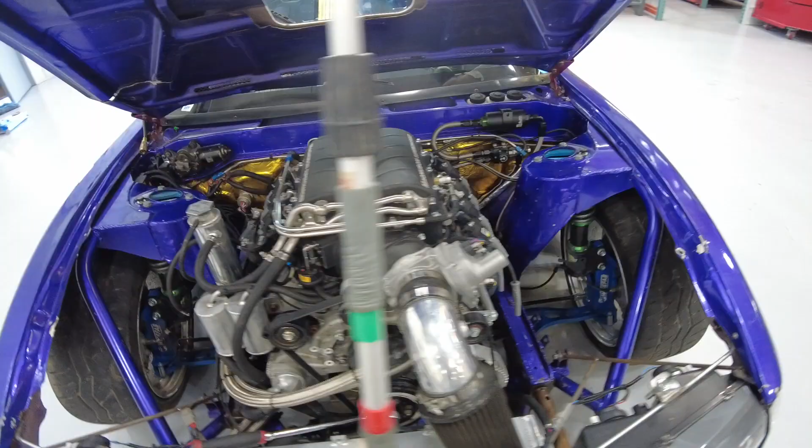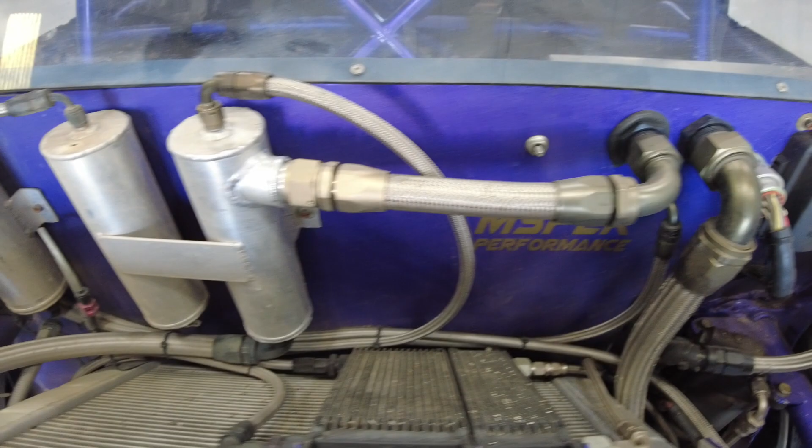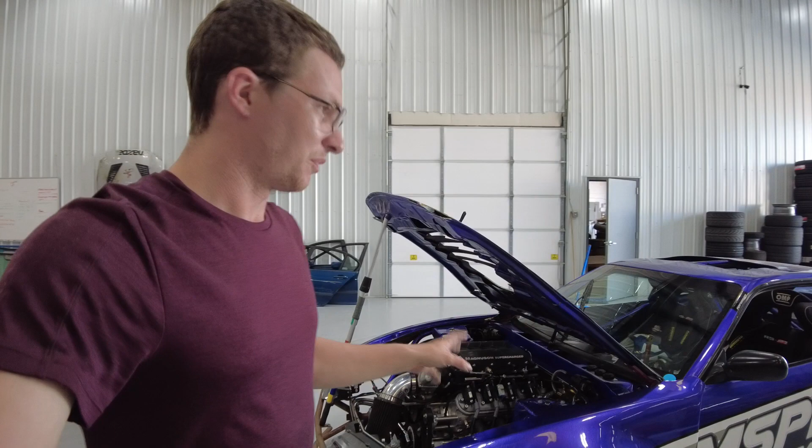The deal with Wes's car and why it's here is that on the practice day we went out and did two runs and it started overheating really badly. That's now a history of overheating with this car. When we were out at Hallett, it had some overheating issues, and we know the system has water, we know it's got good pressure, we've checked the cap. It's time to dig into this and figure out what's actually wrong, and the motor also struggles to start at this point, so we're going to dive in and see what we can figure out.

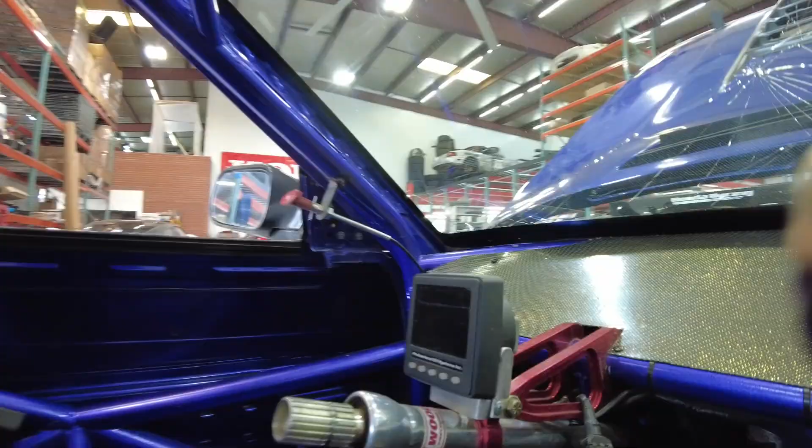This thing is running a crate motor LS3 with the big Magnuson supercharger kit. It also runs Pro EFI engine management, and it's got the little Pro EFI display in there, plus a nice little ARC PDM setup.

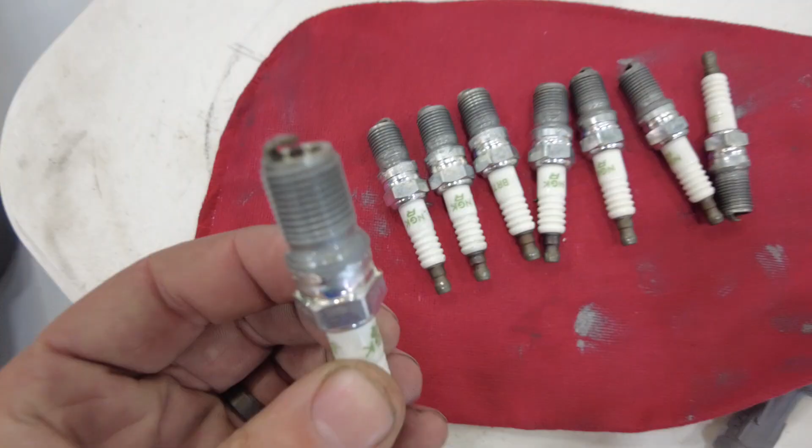I pulled out the plugs and gave them a quick look, but everything on these plugs looks really good, all identical, so that didn't tell us anything. I did a compression test, and though my compression tester probably doesn't read that accurately, it showed about 145 to 148 on all cylinders except for this one. We need to run a leak down on this cylinder and see if something's up with that.

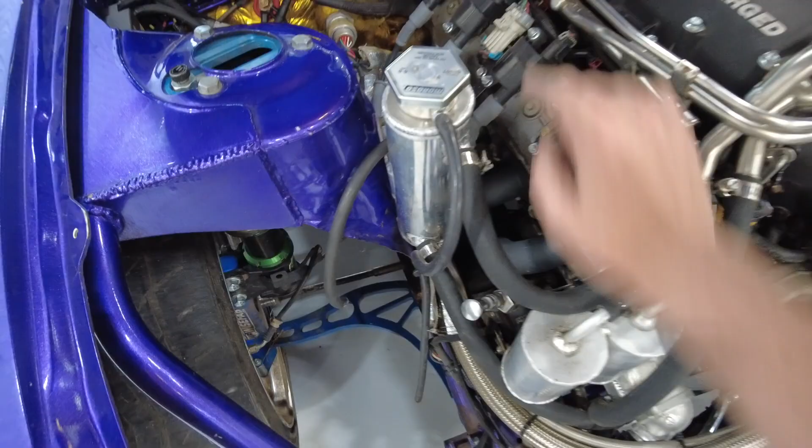Yeah, definitely something of concern here. 22% down on this cylinder, not good, and that's coming by the rings, so that's not good. Let's check another cylinder just to compare. Okay, here we are on the cylinder next to it, so that's quite a bit better. Not amazing, but quite a bit better.

Probably gonna get the borescope out. I want to look in those cylinders and see what the pistons look like. With the motor overheating as badly as it was, hopefully we don't have some other piston damage because of that. I got a fresh toy from China here.

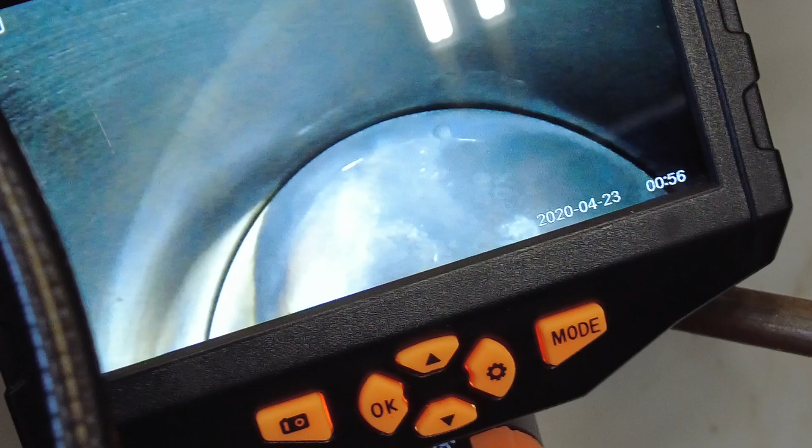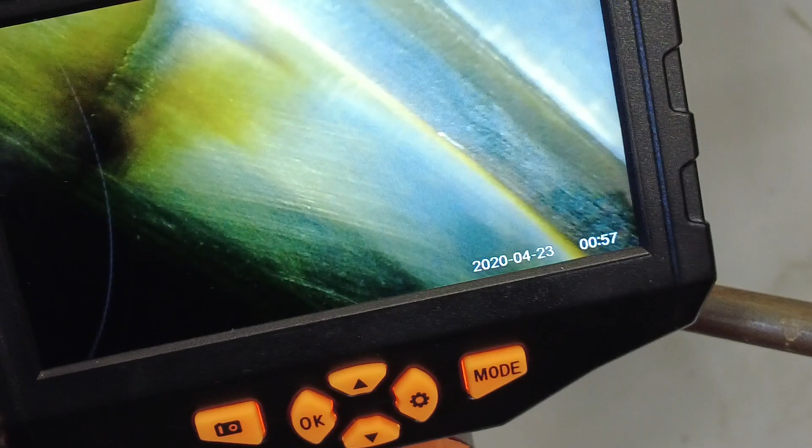Only the best Chinesium. I'm pretty excited about this new scope because it actually has two cameras, one on top and one on the side. That's really going to make looking at valves and things easier on these cylinders. Let's take a look at cylinder number 4, because its leak down was not looking so hot yesterday.

Not the best angle, let's flip to the other camera. Okay, so now we're looking at the cylinder wall. Well, there's your problem right there.

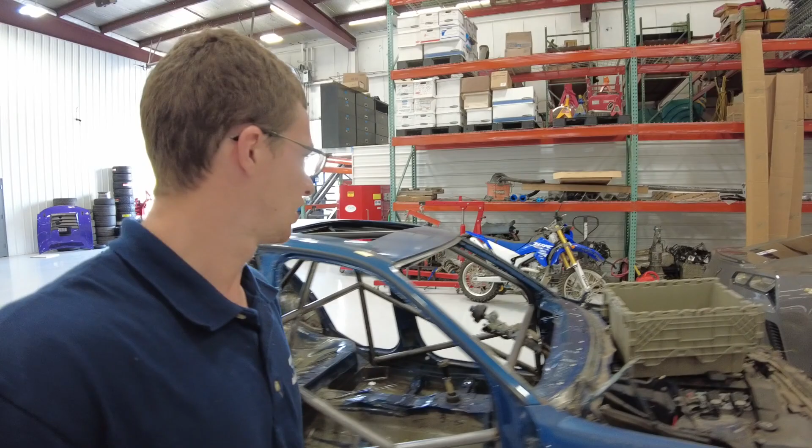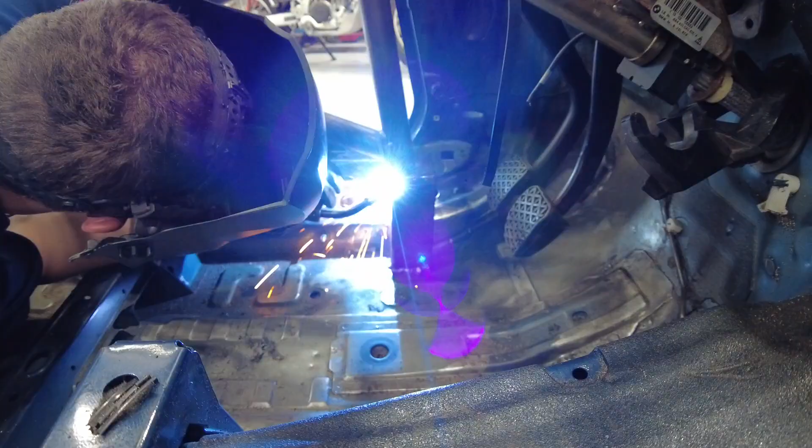So we get a hold of Wes and guess we get a fresh motor for this thing. We'll go from there. The 240 will sit for a little bit while we get a fresh motor for it and get it going.

And for tonight, it's time to work on the E46. So let's get the welder back out and get that cage finished. We want to make the steering column mount for that tonight, so let's get the steering column mount going.

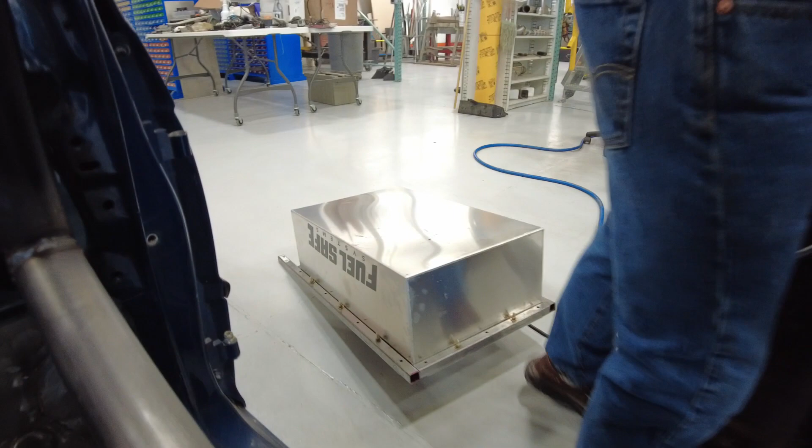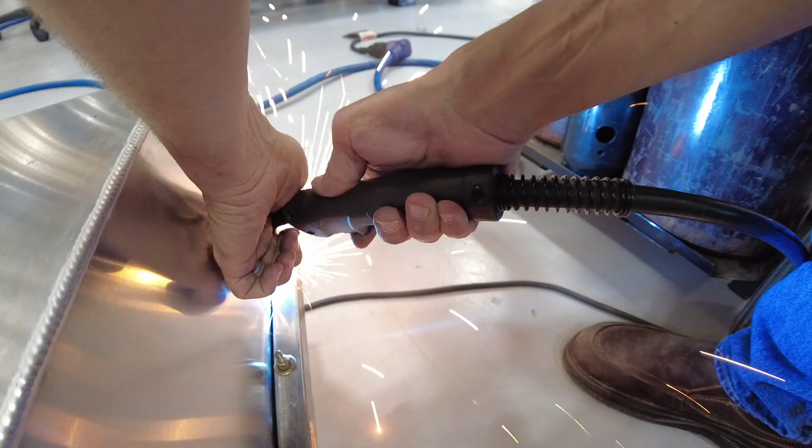Ooh, and I need a mount for the PDM, so a couple little things we'll get done on the cage. Let's get the CAD, get the plasma going, should be fun. Alright, get my boxes welded in, pretty excited about these.

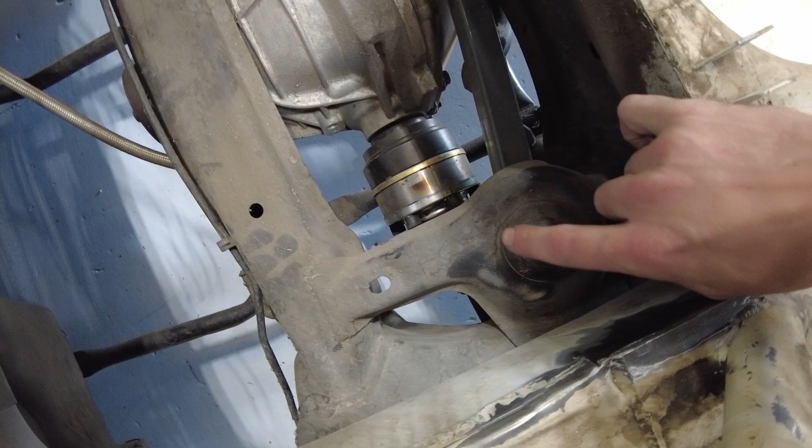Finally gonna finish this thing, those at the back corners. Finally coming together.

That box is in, that box is in. Pretty much all the boxes are in, but I gotta do the top of this box. The cage is just sitting here, so we just grab it and pull the cage over, and we should have good access to the top of that. I'll get it cleaned off and welded up.

Alright, that looks good. What are you working on? I am building a frame for the new fuel cell on Taurus.

Oh yeah? Here, we're gonna need this little guy. Ooh, new fuel cell frame? Nice.

Did you pull the subframe yet, or cut it? I have not pulled this. So, we do need to pull this subframe out so we can cut the tops of these off like we did on Tramp. That's looking nice.

What step is this? 1057? How many years have you been working on Moose?

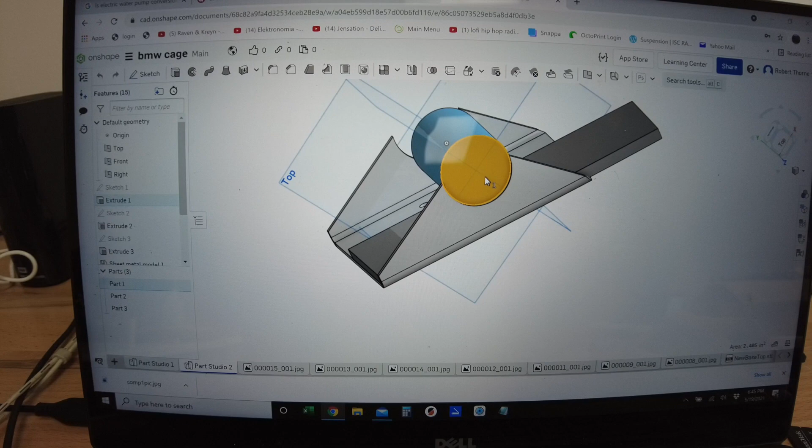Taurus SHO, yeah. We actually had a team, Showtime. And we went to a Lemons race, and the guys that won that race were some Showtime guys out of Houston. We got to become friends with them, and that year I ended up running a 24-hour race with them out of No Problem Raceway. I remember that, in Louisiana.

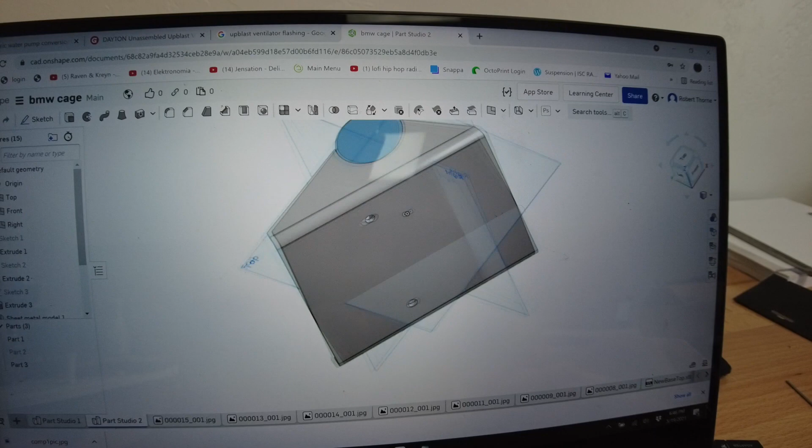After that, the next year we formed a team and all ran together. That's when we took the title that year because we had so many cars, and you got points for every car entered in the race.

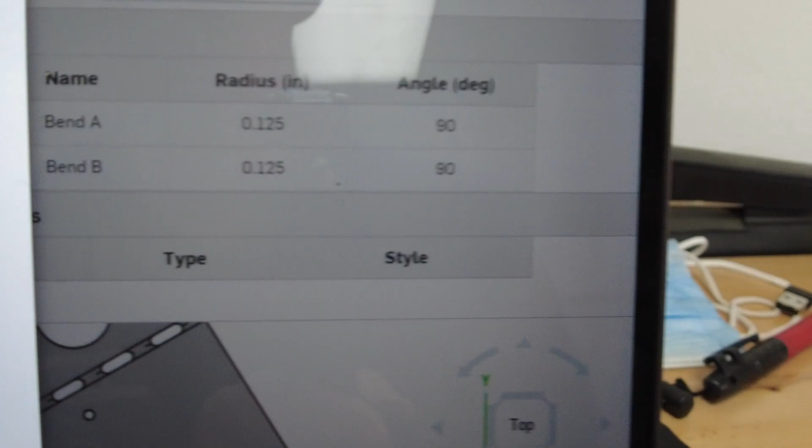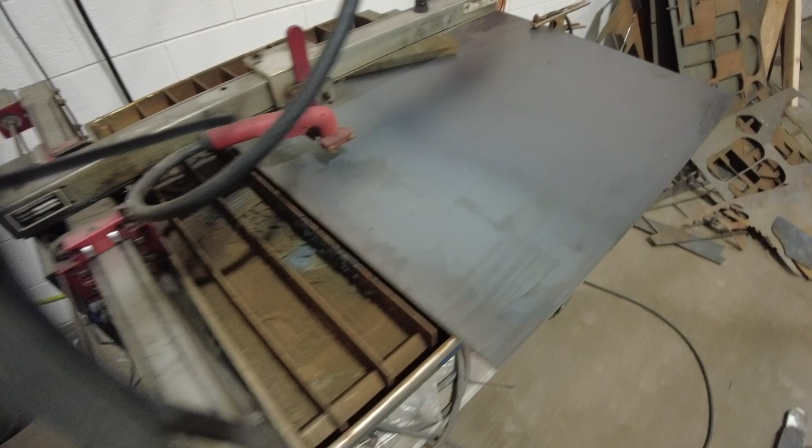How many SHOs did you run? Five. A five-SHO team. Yes. We actually got a Grassroots Motorsports double-page layout of all the cars lined up. We'll have to get that. Yeah, I got a copy of it somewhere stashed away. It's kind of cool. I've always heard of Chris's famous all-SHO team.

Alright, back to work. Okay, cage is welded in. What we need to do now is grab the laptop and lay out a steering column mount.

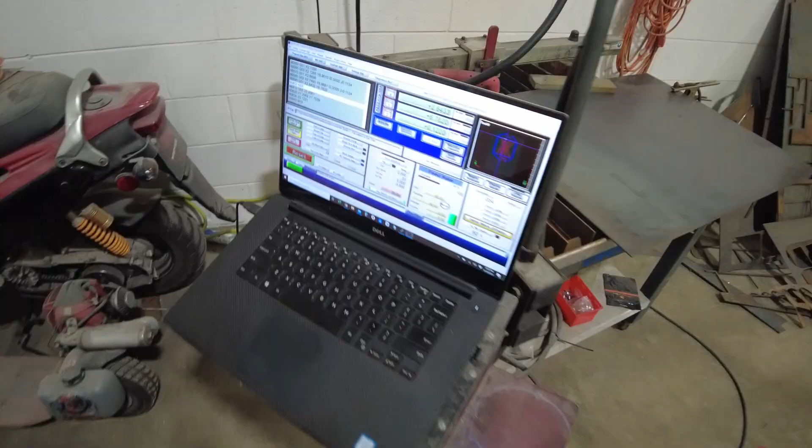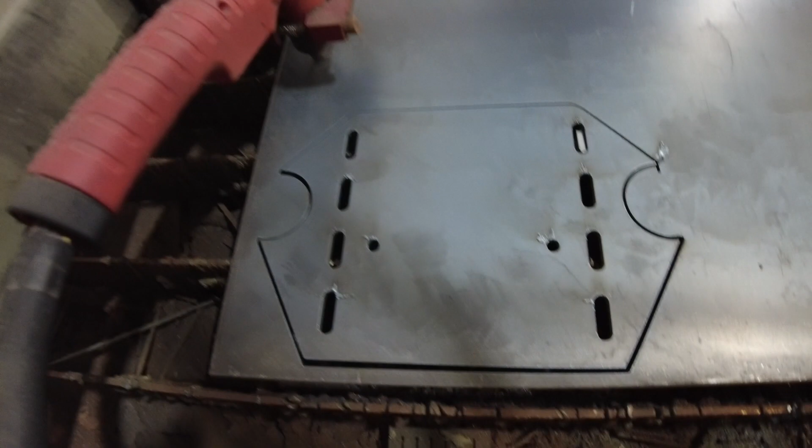Okay, let's see here, BMW cage bits. Started drawing this up the other day. Here's the harness bar, this basically represents the plate of the steering column. We can turn that off, and I put a sheet metal model around them. It's got some mounting holes and it's offset. So there's the harness bar, and here's the steering column coming up at an angle.

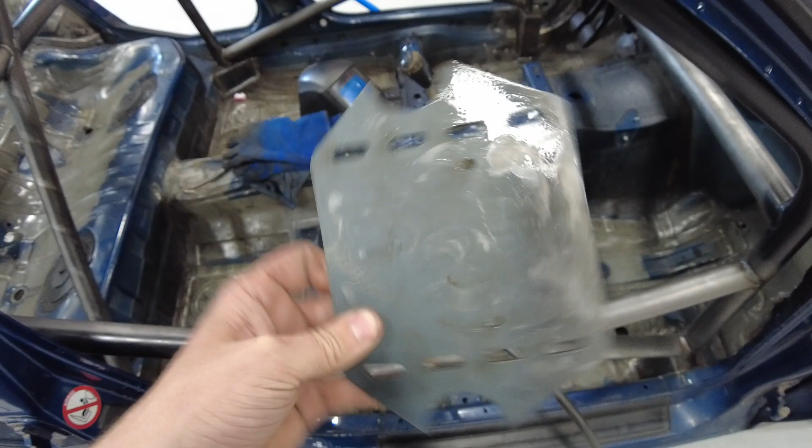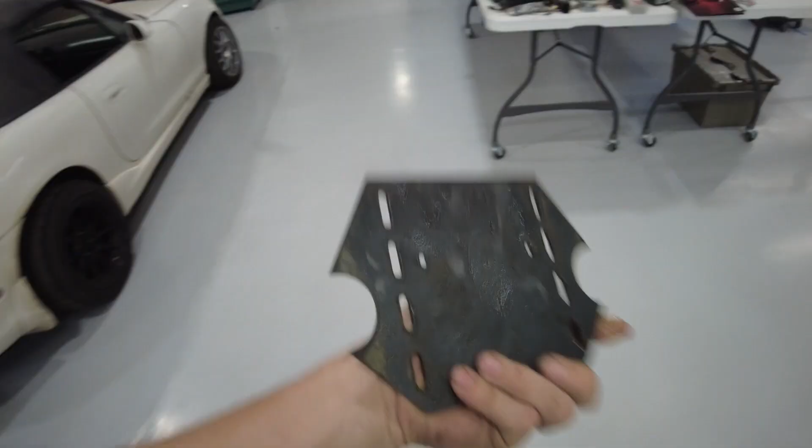Drawing the generic shape I wanted, extruded, located the holes in the offset. Hopefully this is pretty close. So we'll just get the flat pattern of this. Yep, basically that, and probably want to perforate these bend lines to make it easy. Okay, there we go, got some easy perforations in there. Okay, export to flat pattern.

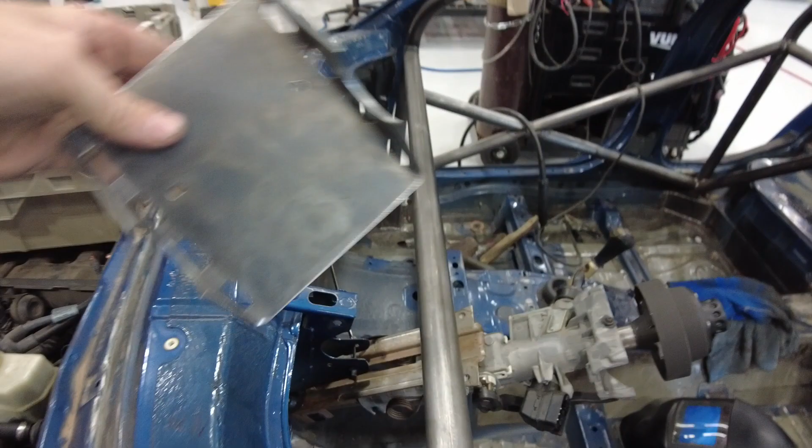Once this is in SheetCam, we can just put our tooling in and have SheetCam make the G-code for this. Alright, hopefully that's close. Got that G-code loaded, got some material, should be good. Hopefully. Yeah, no problem.

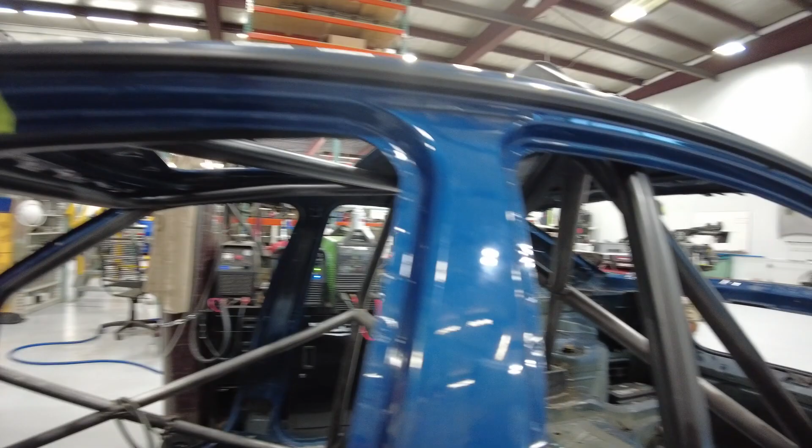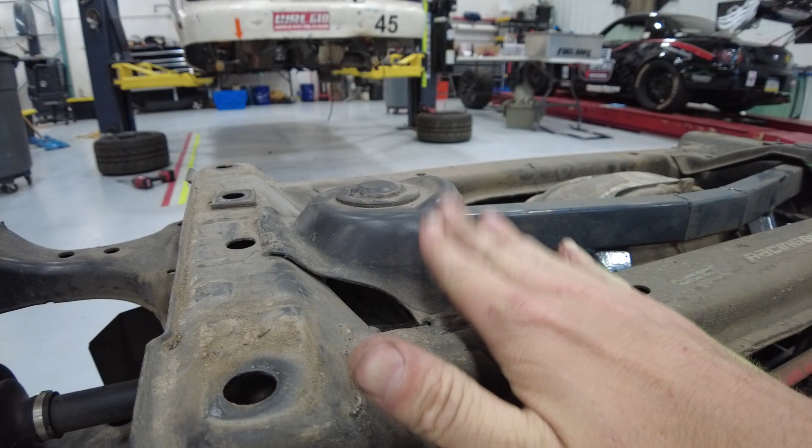Hopefully we got this pretty close. We'll get it cleaned up here in a minute, but the awesome part about having the plasma cutter do stuff is that things just fit. It's not like I could have gotten this type of fitment by hand.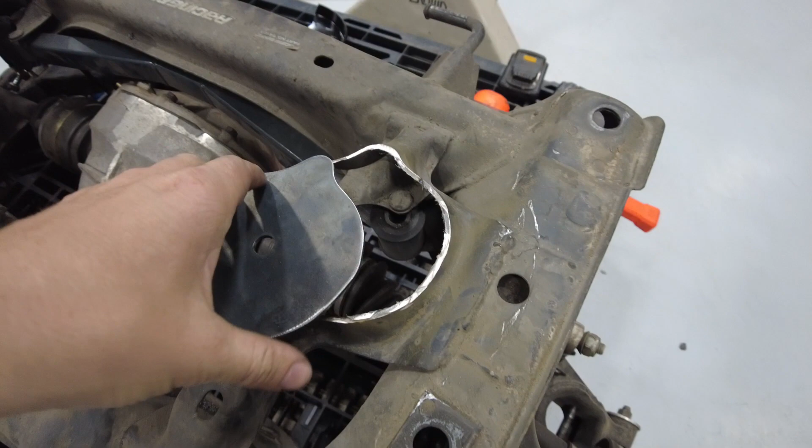Yep, alright, clean this up. Knock the slag off. Time to bend it up.

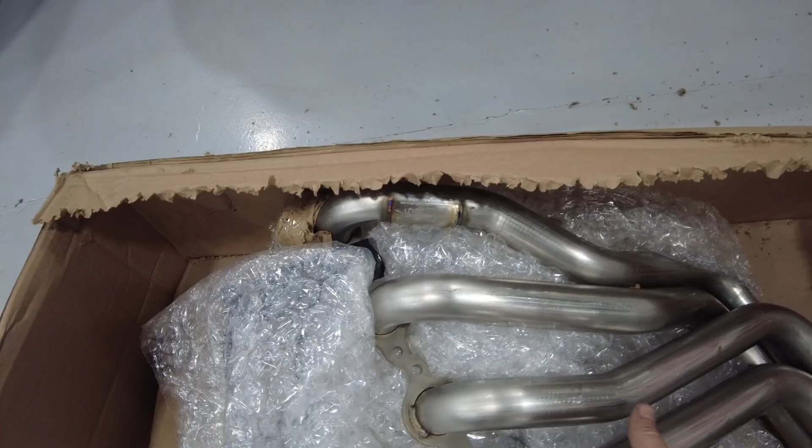I think it's pretty close, but I think I'm going to have to slot these holes just a wee bit. Yeah, it's pretty cool. The holes aren't quite perfect, but the rest of it seems nice. It's little things like this that make these projects take forever, but there you go - little steering rack mount.

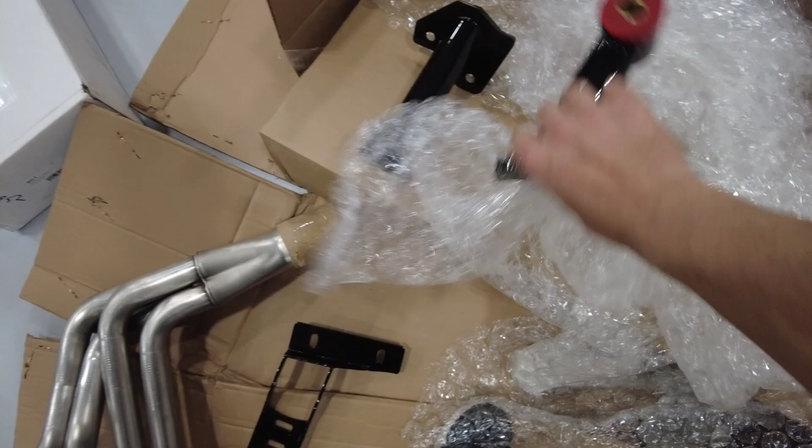It's just one more thing checked off the list. We still have a window net to put in. Let's get that hardware and get that in too.

Chris has got the laser out. Alright, our laser line on there. Get that cut out.

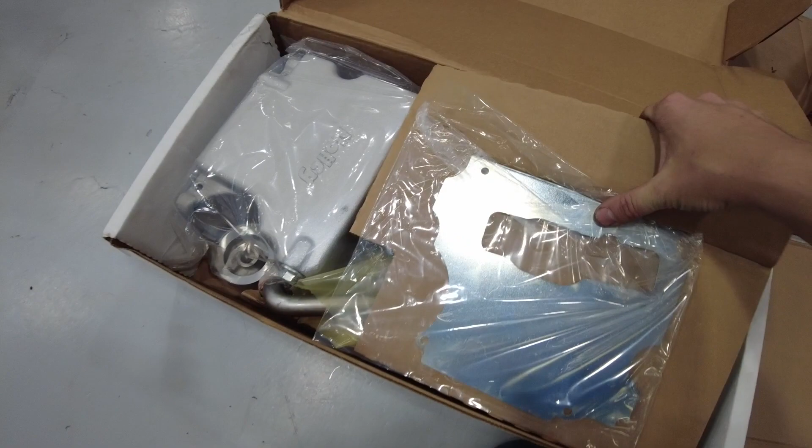So we're just gonna do the same thing as last time, cut these tops off and weld plates on level. That way none of this sticks up above the frame rails, so the fuel cell can sit as low as possible. Chris will keep going on that.

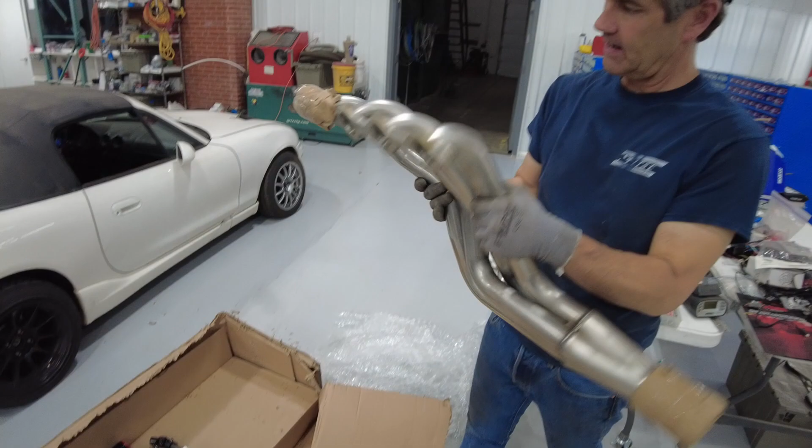Hey, there you go. You're gonna need that. Alright, last thing tonight, I got some packages in. Terry sent these over from Vorshlag.

Oh yes, finally got headers in for the E46 build. So we got a transmission mount, got some engine mounts, and got a new collapsible steering column, so no more squishy steering. Pretty excited, these headers look awesome.

We also got an oil pan with the cutest little baffle ever. This is just a Holley rear sump LS oil pan, but apparently they work really well for this application. Check it out, man. Yep, that's the real deal right there. Got a nice collector, expands up to 3-inch. Now we just need to get a 2-to-1 collector.